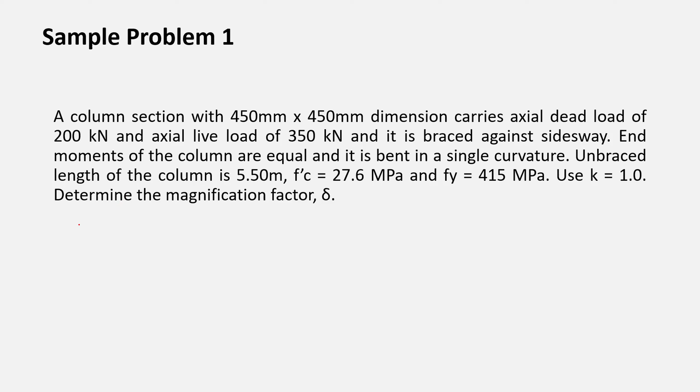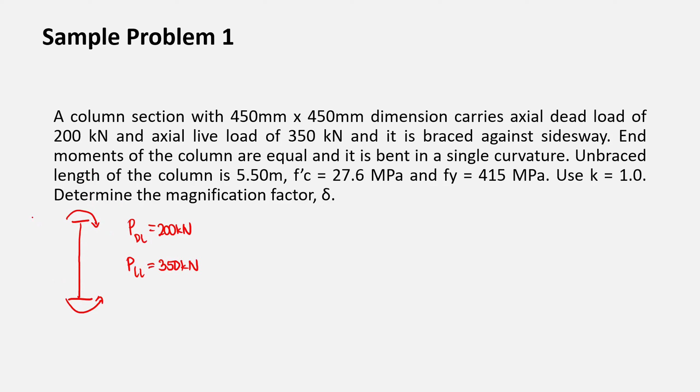So let's draw first. So ito yung column natin. Then it carries P dead load of 200 kilonewton and then P live load of 350 kilonewton. So yung moment daw, yung end moments, assuming that they are equal. So pwede siyang, ito yung M1, ito yung M2. But we know that M1 is equivalent to M2. Then it bends in a single curvature. So ganyan. So the ratio of your M1 over M2 is equivalent to negative.

Then, yung value daw ng ating length, the column or the unbraced length, that is 5.5 meters. f'c is 27.6 megapascal. And given that Fy is 415 megapascal. So, gamitin daw natin value of K, that is equivalent to 1.0. So first thing that we need to calculate is to check if your column is slender or not. Okay, check of slenderness.

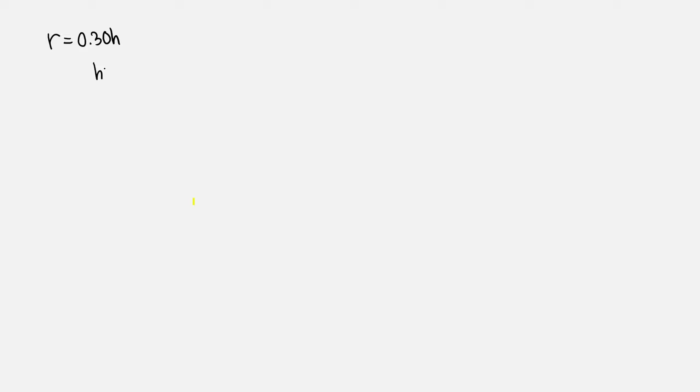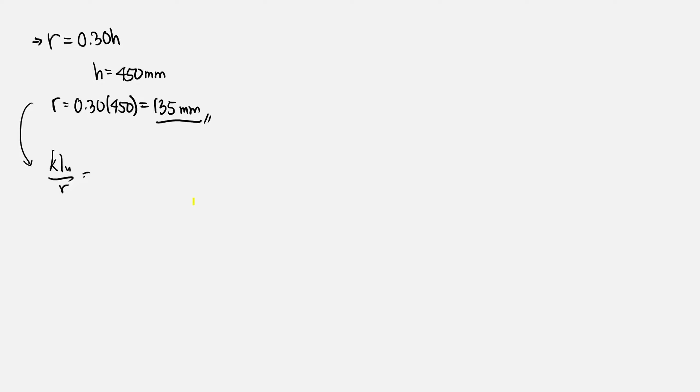135. Then, let's substitute now to the checking of the slenderness ratio. So, yung KLu over r, that's equivalent to, yung K natin ay 1.0. Then, yung Lu natin, that is the unbraced length. So, yung length natin ay converted into mm. So, 5500 siya. Divided by radius of gyration of 135. Again, i-check natin siya with 34 plus 12 M1 over M2.

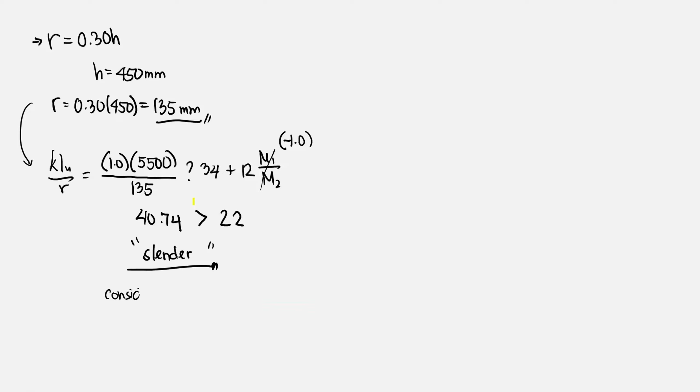This is 40.74, and then 34 plus 12 times the ratio of M1 and M2 ay 22. Then, as you can see, yung KLu over r natin ay greater than. So, talagang slender siya, no? Yung column is slender. So, therefore, we need to consider yung slenderness effect. Consider the slenderness.

Ibig sabihin, we need to compute yung ating delta, yung ating magnification factor. But, halimbawa, hindi siya pumasok dyan sa criteria na yun, no need to consider yung slenderness niya. Ibig sabihin ay, pwede natin i-consider yung column as short column. Kumbaga, hindi malaki effect ng bending sa ating column. Okay? So after natin ma-determine yung slenderness effect sa ating column, pwede na tayo mag-compute ng ating

magnification factor. Sabi natin, magnification factor can be computed using... una muna, hindi naman nila sinabi kung may lateral loads. So therefore, yung kukumpute lang natin ay yung delta B. So paano nga natin kinukumpute yung delta B? Ito ay due to gravity loads. That is Cm over 1 minus PU over 0.75 PC. So, kumpitin muna natin yung bawat variables dyan sa ating formula.

So, yung Cm natin, that is equivalent sa 0.6 minus 0.4 times M1 over M2. Again, M1 over M2 is negative 1.0. Substitute natin. So we have 0.6 minus 0.4 times negative 1. That is equivalent to 1.0.

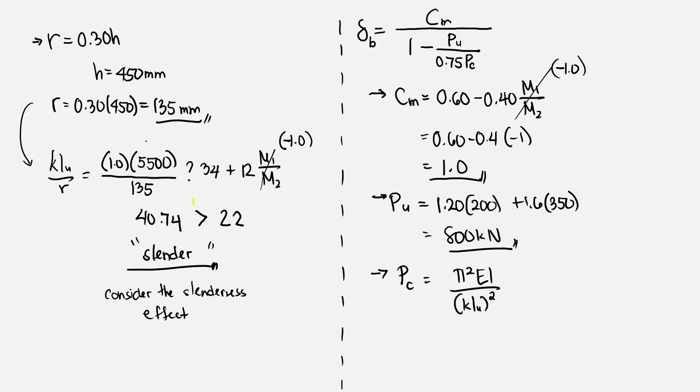Next. Then to compute now your PC, that is equivalent to pi squared EI over KLU squared. So, computein muna natin yung EI. Yung EI natin can be computed using conservative formula, that is 0.4 Ec Ig over 1 plus beta DNS. Compute natin yung Ec. Ec is equivalent to 4,700 square root of fc prime. So, ito ay equivalent sa 4,700 square root of fc prime, which based on the problem is 27.6 megapascal. Ito ay equivalent sa

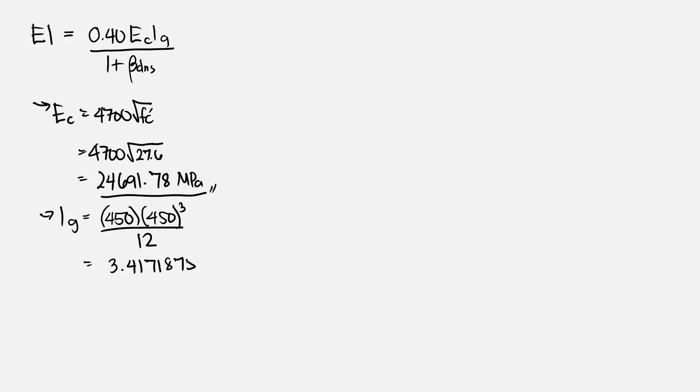24691.78 megapascal. The next, computin natin yung Ig, that is just the gross moment of inertia of your concrete. So, yung concrete natin ay square. So, most probably, yung kanyang moment of inertia ay BH cube over 12 lang. So, ang value ng moment of inertia ay 3.4171875 by 10 raised to 9 mm to the fourth.

Then, lastly, yung ating beta DNS. Yung beta DNS can be computed using 1.2 of P dead load over PU. So, meron na tayong P dead load, that is 200 kilonewton. Then, yung PU natin ay 800 kilonewton, yung na-compute natin kanina. So, therefore, yung beta DNS ay 0.3. Okay? And to compute now your EI,

EI is equivalent to 0.4 multiplied by 24691.78 times 3.4171875 by 10 raised to 9 divided by 1 plus 0.3. Therefore, yung EI natin ay 2.596198214 by 10 raised to 13 Newton mm squared. Okay? Then, meron tayong EI.

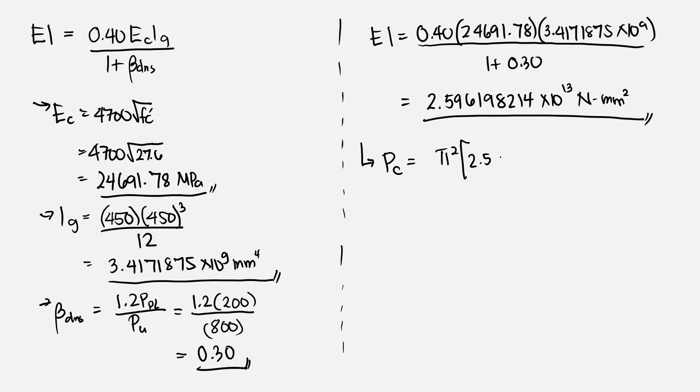Then, pwede natin makompute yung ating PC. Yung PC natin, that is pi squared times 2.596198214 by 10 raised to 13 over yung K natin, that is 1.0, times yung ating LU, yung unbraced length, that is 5.5, and then squared. So therefore, yung ating PC

is 8470561.758 Newton. So to convert, ito ay magiging 8470.562 kilonewton. Ito yung gagamitin natin, yung naka-kilonewton.

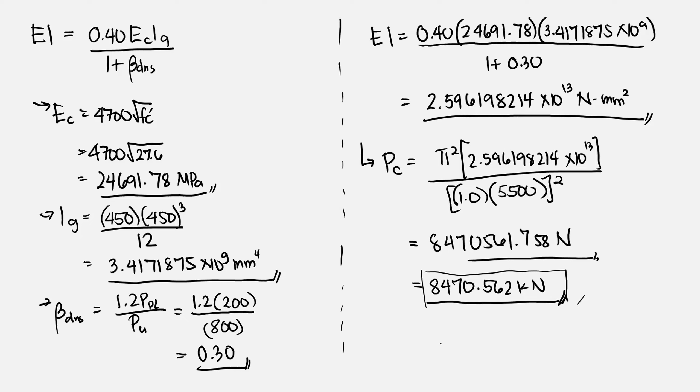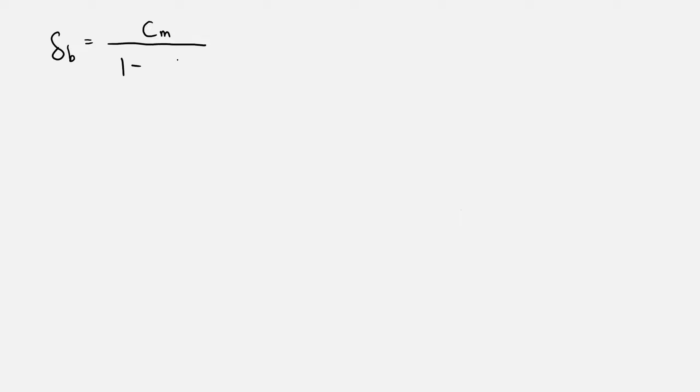After natin makompute yung PC, pwede natin makompute yung magnification factor delta B. Sabi natin, formula natin dito is Cm over 1 minus PU over 0.75 PC. So yung Cm natin kanina is equivalent sa 1.0, divided by 1 minus PU. Yung PU natin kanina ay 800 kilonewton, divided by 0.75 times yung PC natin na 8470.562.

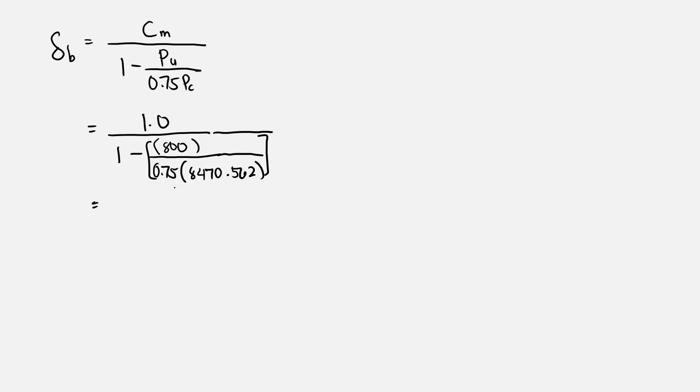So therefore, yung value ng delta B natin is 1.144. So ito yung gagamitin nating multiplier doon sa ating larger moment para makuha natin yung magnified moment natin. And then yung magnified moment na makompute natin, yun yung gagamitin natin pang design doon sa ating